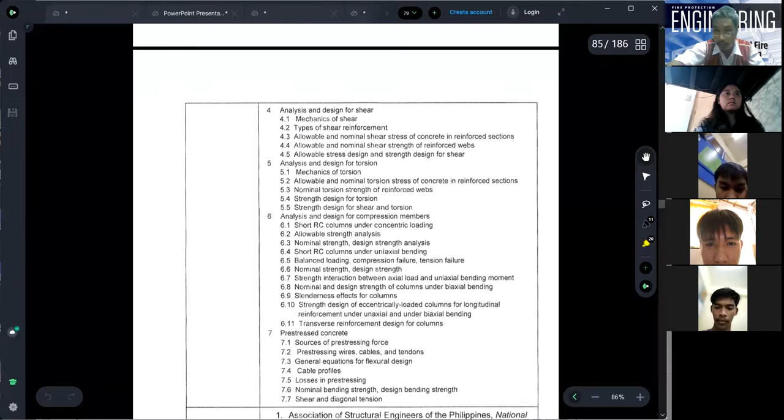So in this video, let's start our course, which is principles of reinforced concrete and pre-stressed concrete. Anyway, this is again a new subject. It is not the same as previous engineering subjects because we are now on the new curriculum. Let me explain: our course is actually described by this document, which is the rules and regulations, or the policies and standards of Bachelor of Science in Civil Engineering.

And we have to follow the CHED CMO 92 series of 2017. Principles of reinforced pre-stressed concrete. Beforehand, we have a subject, reinforced concrete design, and at the same time another subject, pre-stressed concrete design. So in our school, we only have reinforced concrete design, or RCD. That's why before it is called RC, meaning reinforced concrete. RCD meaning reinforced concrete design, and PC meaning pre-stressed concrete. PCD, pre-stressed concrete design. That's why it's harder now because it is called principles of reinforced pre-stressed concrete.

And now we can shorten it up to PRPC. So it is just the same as RCPC, but we are going to call it in short, PR meaning principle of reinforced, PC meaning pre-stressed concrete. So PRPC.

So this engineering plan has an approval. Approved, so there is an approval stamp on this. So the requirement is to get hold of a copy of an engineering plan.

So an engineering plan will always have what? The minimum requirement is structural, architectural, electrical, and plumbing plans. That is the minimum requirement. The full requirement, in addition to these 4, includes geodetic or the site and zoning plan.

Also the title certificate, the Transfer Certificate of Title or TCT, by a geodetic engineer. Also we have the sanitary engineer or sanitary plan, and the electronics plan or ECE.

So all in all, there are 8 professionals for a full engineering plan, but a small project would only need 4. You will not have a building without architectural plan, structural plan, or electrical. It is impossible nowadays. Before, 30, 50, 100 years ago, it was possible to live without electrical. You cannot live without electrical nowadays.

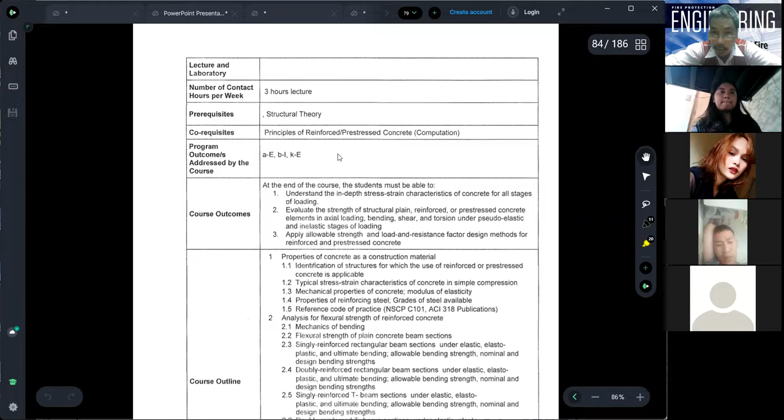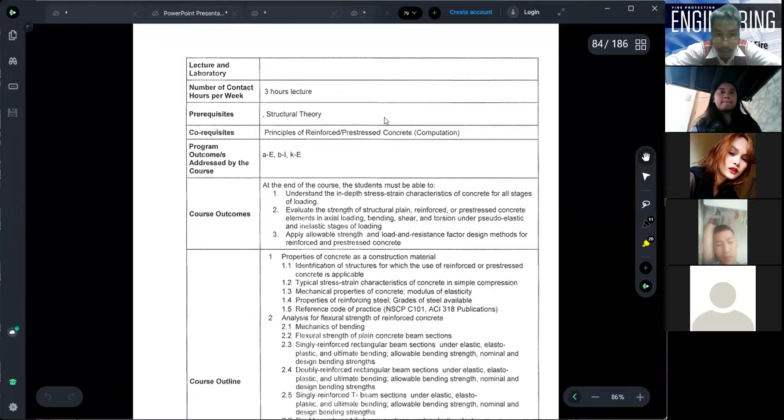We don't need to explain them because you already know structural theory. You need to have the minimum knowledge of structural theory. Again, what do we mean by minimum knowledge? You can take a look, you can search for structural theory. Let us do it right now, let us look for the structural theory in this, or theory of structure.

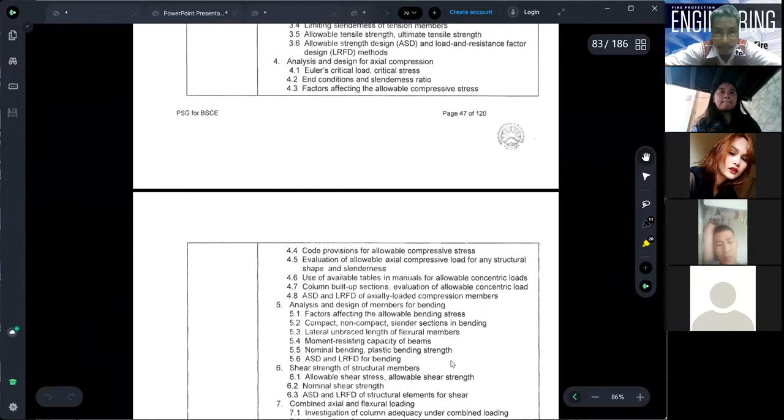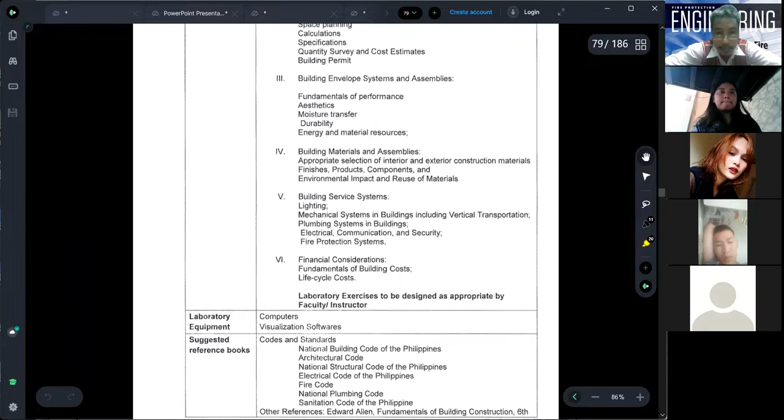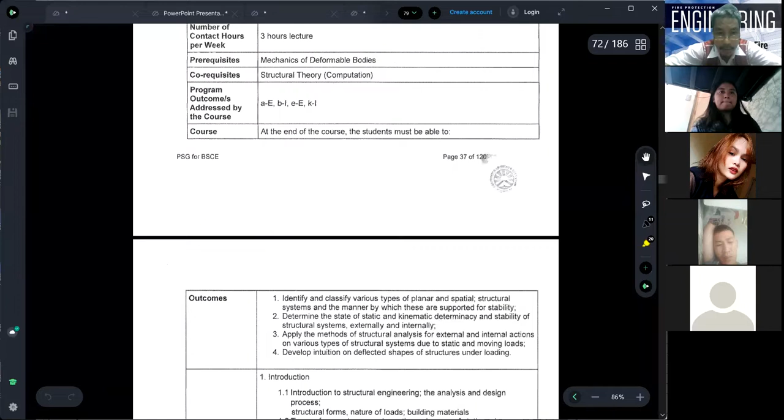Let's go back, let us search for it. So, structural theory computation. You also have a laboratory for structural theory, and you also have the lecture part. So structural theory -- what do you mean by structural theory?

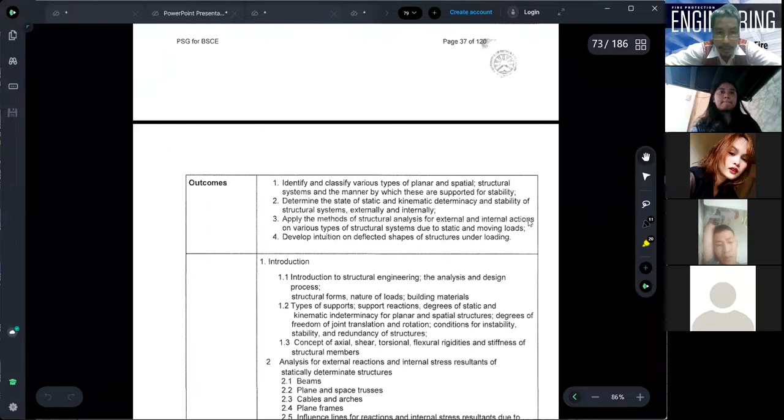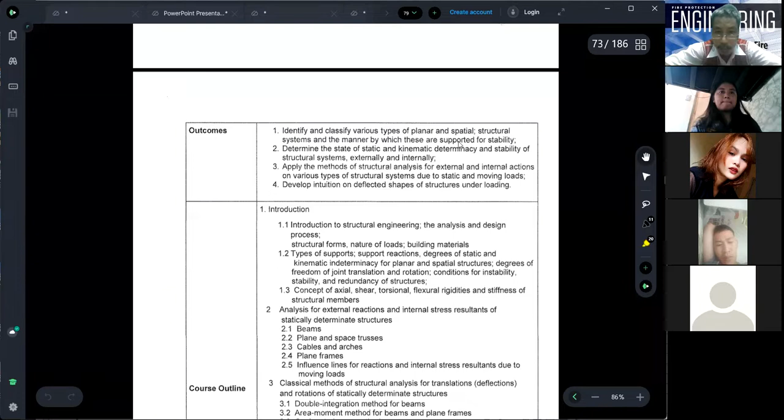It means that you can identify and classify various types of planar and spatial structural systems and the manner by which these are supported for stability. You can determine the state of static and kinematic determinacy, and stability of structural systems, externally and internally. You can apply the methods of structural analysis, meaning you can solve for external and internal actions on various types of structural systems due to static and moving loads.

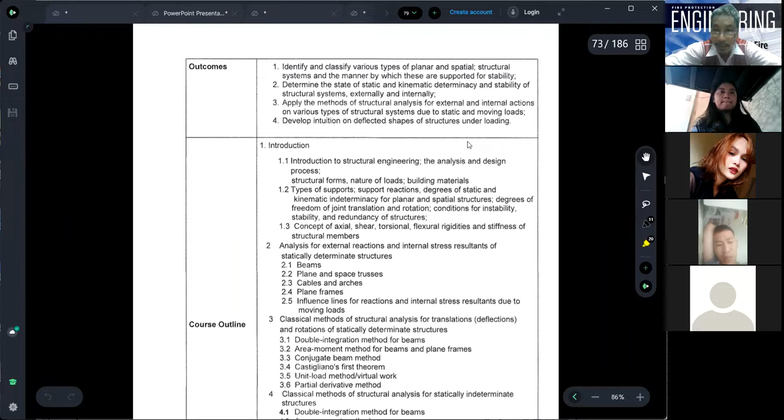Okay, very clear? And you can develop intuition on deflected shapes of structures under loading, meaning you have an insight. You develop an insight because of the learnings that you gain.

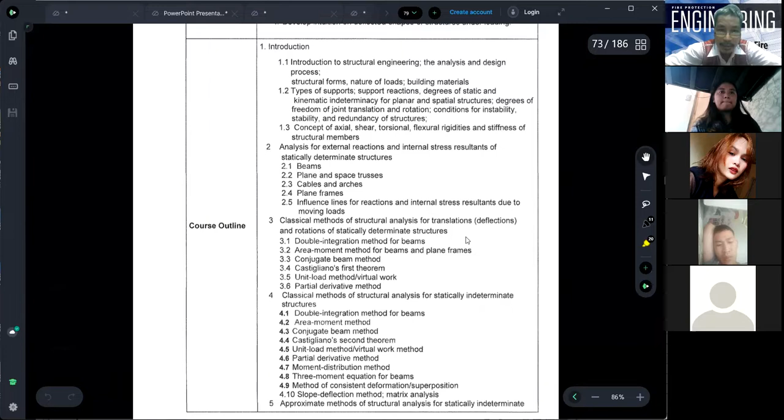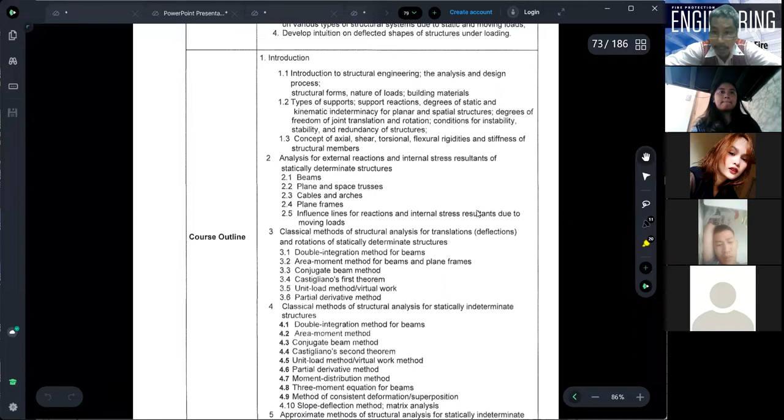So what are the details of this? You can take a look. These are the topics that you learn in structural theory. I am not asking if your teacher discussed it or lectured on it. I don't care. You have to be prepared to know the minimum knowledge about structural theory.

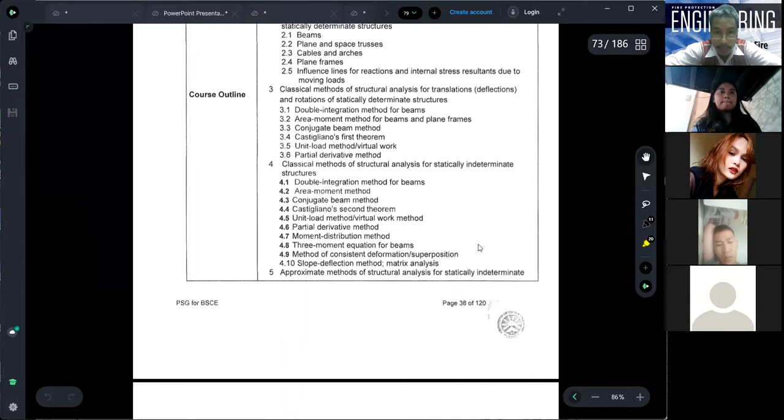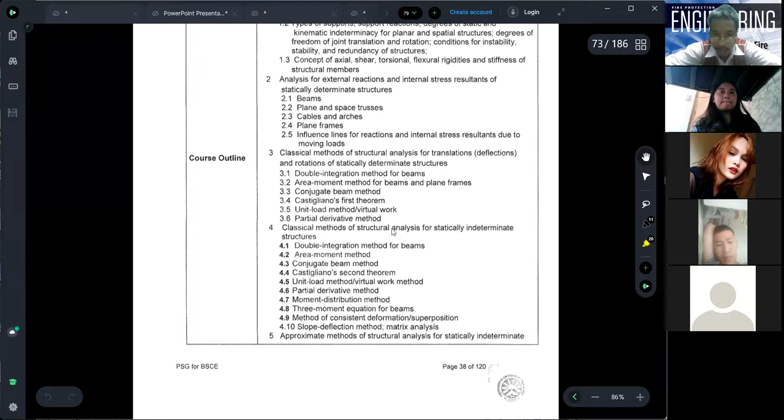That is what I am looking for. For example, classical method of structural analysis, translation or deflection, rotation. You know how to statically analyze statically indeterminate structures: DIM method, AMM method, CBM method, Castigliano's method, unit load method, partial derivative method, MDM method, three moment method, SDM method, and method of consistent deformation.

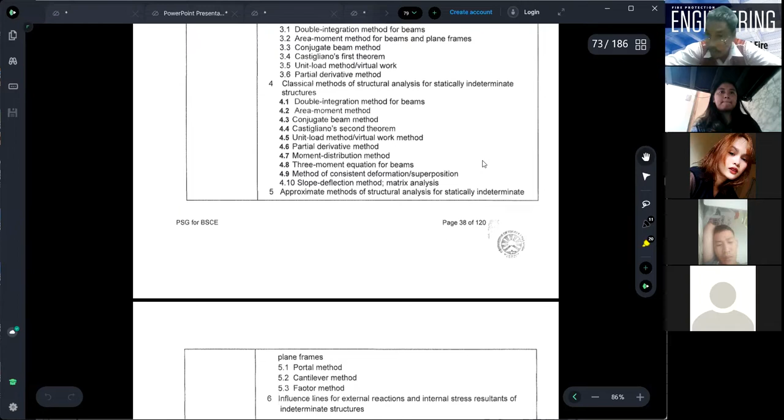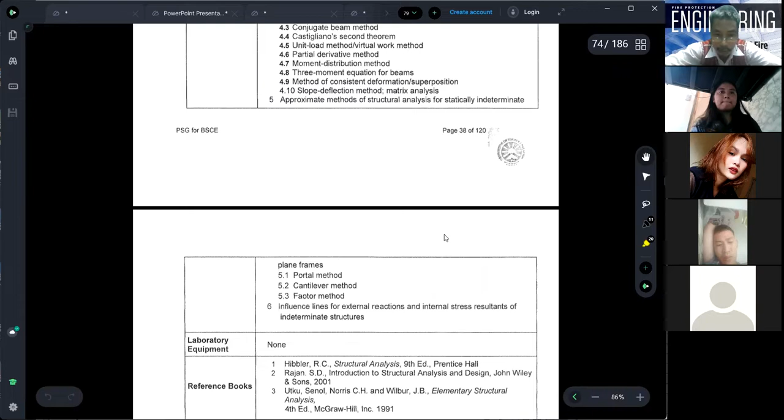So, if I am the teacher of this subject, before teaching it I always see to it that I complete this. Even this one, part 5, what are those? Portal method, cantilever method, factor method.

We go as far as influence lines. You have to be able to know what we mean by influence lines, external reaction, internal stress resultant of indeterminate structures. So those are the minimum requirements.

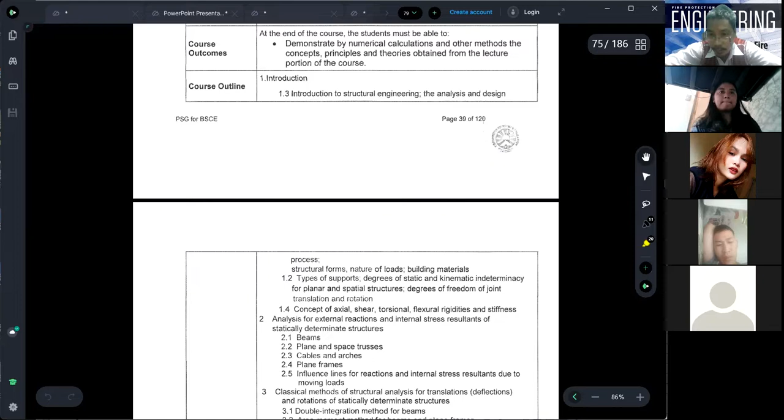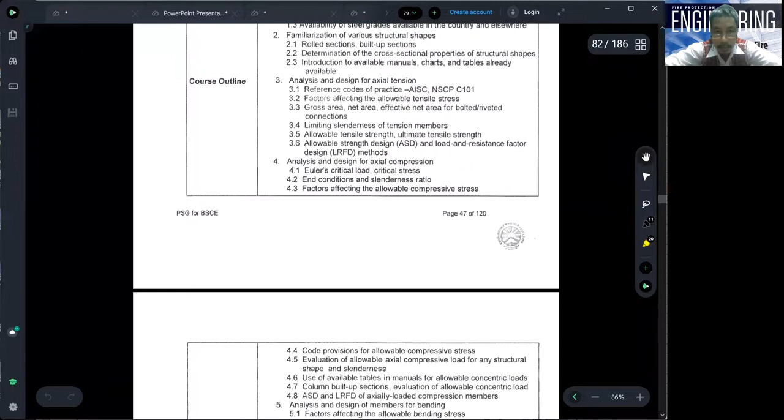So let's go back to our subject. Our course is reinforced... this is our course: Principles of Reinforced and Prestressed Concrete. In short, PRPC.

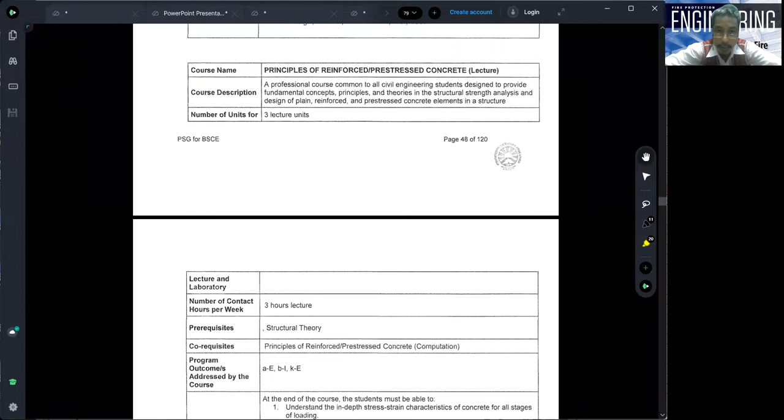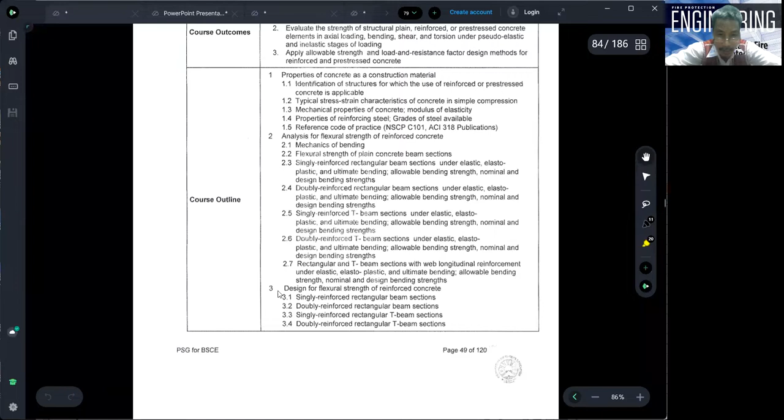So we will have 6 parts, or actually 7, I think it is 7 parts. Part 1, properties of concrete, we will discuss. Part 2, analysis for flexural strength. Part 3, design for flexural strength. Part 4, analysis and design for shear. Part 5, analysis and design for torsion.

So immediately we will discuss analysis and design. We will not discuss what is shear, we will not discuss what is torsion. Those things are already known from theory of structure or structural theory. We will immediately use what you learned from shear, from torsion, from bending, from flexure, and apply those concepts and principles into analysis and design of the members and elements that we need in our course.

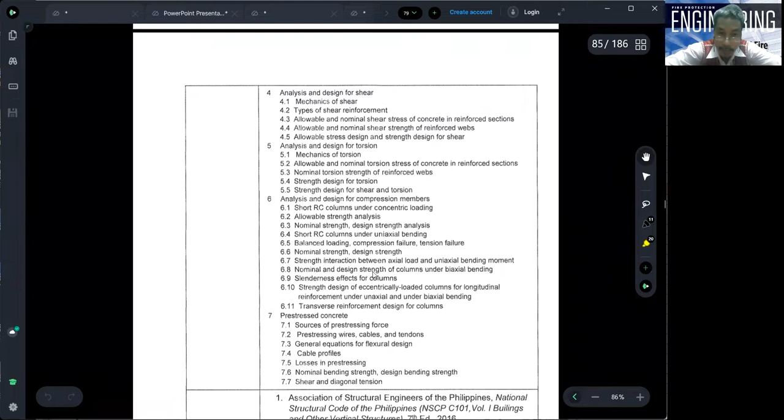Compression members, okay, what do you mean by that? And number 6 is design and analysis for compression members, and number 7 is prestressed concrete. We will give an example, and later on it will be very clear to you what we mean by analysis and design. There is a specific description of what an analysis is and specifically what a design is.

When we are talking of structural design, this is a structural design about what? Reinforced concrete and prestressed concrete. So the last part is about prestressed concrete, all in all. So these are the coverage of the topics that we have to learn.

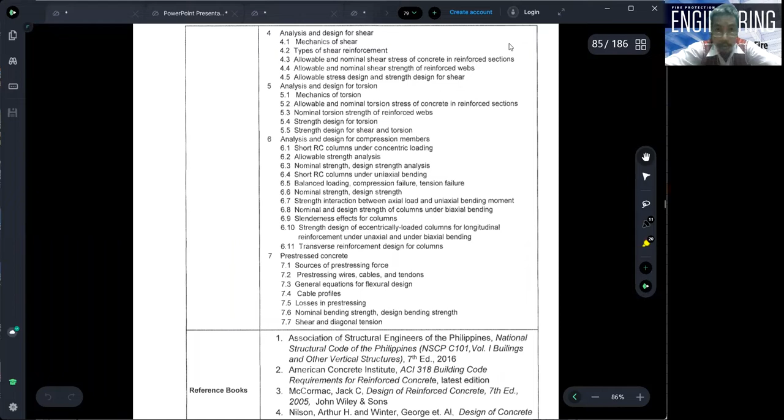Again, we will use any authors, but if you would like to ask me, I will use, for example, 3 different authors, which is also suggested by the civil engineering CMO. I may use Wight, MacGregor as an author, and I could also use McCormac. McCormac is also good.

So this is Wight, MacGregor, as you can see the names are there. Reinforced concrete by Wight and MacGregor, meaning James Wight, James MacGregor. They are both of the same name, James.

Also, but you only need to use one. You have to pick one. Any author will do; I am suggesting either one of those authors. But if you don't have them and you have another author, it's okay. The same concept, the same principle will be discussed. These topics are true all over the world, not only in our school, not only in our country, but around the world. So any author will do, but it depends upon the author.